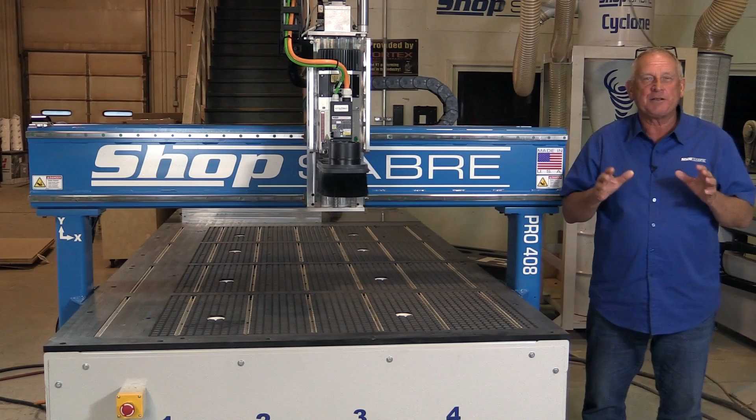The machine we're going to be using in the demonstration today is actually a ShopSabre Pro 408. 408 simply means 4 foot by 8 foot. Pro means production. You know, people ask me all the time, how do you really judge these machines? I said, well, it's really simple.

Here's where I start. I start at the base, and I look at how the base is structured. These machines are all welded. It's structural steel. It's made in USA steel. So I think if you start with quality components, that creates a great basis, and that's how we've done these.

Now, the other parts of the frame are actually the gantry, and once again, these gantries are tubular steel, all welded, and we also have tubular steel supports. So those are the 4 frame parts. Now let's talk about what makes all this stuff move, and it's called motion control. The first part of machine motion is actually defining the axis of travel, and here's how we do that.

These are actually precision contour guide rails, and you'll find those in all 3 axes. We get asked sometimes, how do you determine what this spacing is? Well, we use a process for engineering called finite element analysis, and that basically tells us where to space those to get the maximum support for the cutter in the material. That's why these machines cut so well.

All right, now, what actually moves the machine around are the ball screws, and these machines are all ball screw machines, so that means we have precision ball screws in X, Y, and Z axis. And you know, the application that we're doing is really critical for accuracy. So let's stop a minute and let's talk about how this whole ball screw thing fits in.

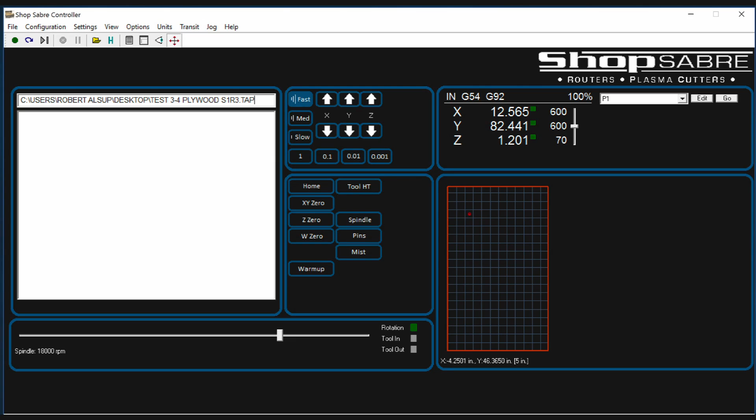Now, from an operational standpoint, all I really have to do is load a program. Then I click on this little icon, and it displays on the screen what the program is going to produce. Now, that's visual validation. So number one, I know what I'm going to cut, and the other part, it lets me kind of get an idea of where the parts are going to be on the table.

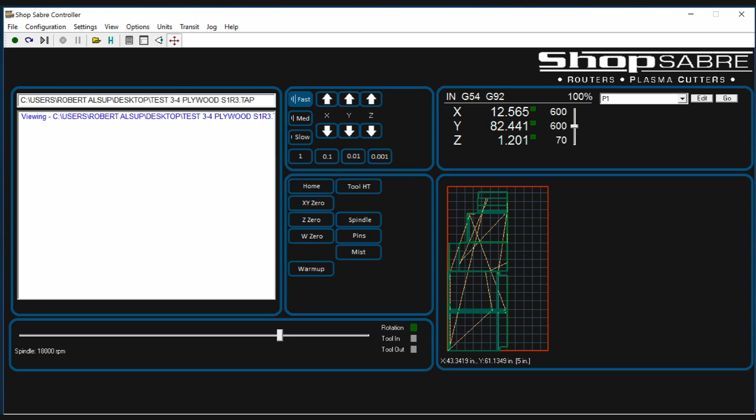When I'm happy with that, I simply hit the green button, which is the start button. The machine starts executing the program, and actually on the display over here you can see the exact live position of where the machine is.

So it's a really, really simple, powerful control system. Now let's take a look at the machine spindle. This machine has a HSD spindle. This happens to be an ATC spindle. That means automatic tool change because the machine has that feature. We offer these in a number of different horsepower ratings based on what your machining applications are.

But you know, here's an interesting part right here I always like to look at, because what we wanted to do was to increase the rigidity of the tool plate, because that allows us to have more axis travel. And to really get the maximum advantage of your machine, you have to have enough axis travel so that if you can get a part under the gantry, you can actually machine it. So that's really what started all this.

So we plugged the data into our FEA system, and we tried 2 or 3 different ideas, and this one hit. The results came back from that, and then we did some testing and cutting, and it really worked well. And then we said, okay, now we know mechanically how it works. Can we reduce the mass of these plates and get the same result? And once again, FEA was used for that. And now you see this feature on all of our machines.

Well, we're talking about mass. So let's talk about another problem, and that is, think about mass of what's on this tool plate now, because of gravity, mass is weight. All right, so here's what happens. When you're raising the spindle up with the ball screw, you're lifting all that weight. When you're dropping it down, it goes down real easy. All right, well, there's an impact with that. Number one, it's going to probably make your ball screw wear out.

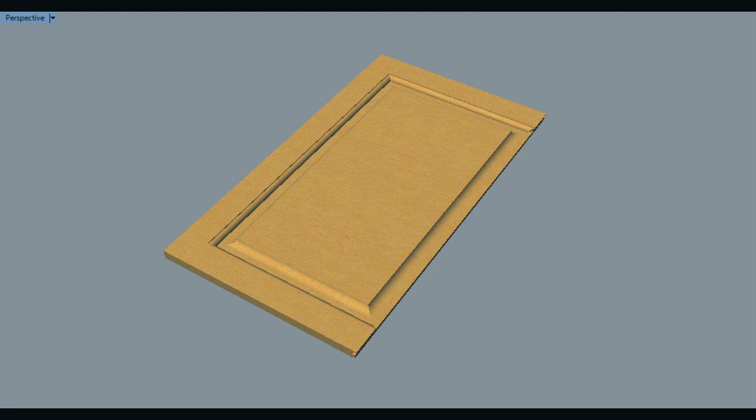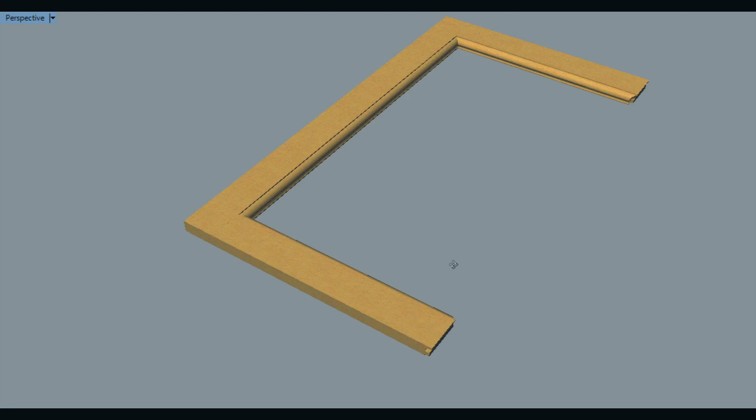And we'll hide that, and what we have left is what's called a stile. Stiles are the upright members, and this molding that you see on the inside here is called a sticking, all right? Now, let's look at something else. Let's get rid of this in the panel, and let's look at what you see down here. And the molding on the end of the rails is called a cope. So you had a tool set called a cope and stick, and that's how all this came about.

And then, of course, the panel actually floated inside of those grooves. So that's where the concept was. What we were trying to do was with tools and MDF create that look in a cabinet. And it became very, very popular, primarily when white cabinets became popular because you could actually paint that. And MDF was a tremendous material to machine out of.

And so that's where this all came about. And there were some people that actually cut these doors out and foiled them, different ways to add adornment to them. In our case, we would typically paint the cabinet white. So that's what we're trying to actually duplicate. Now let's take a look at what we have to do with tool paths to create that raised panel effect on the MDF panels.

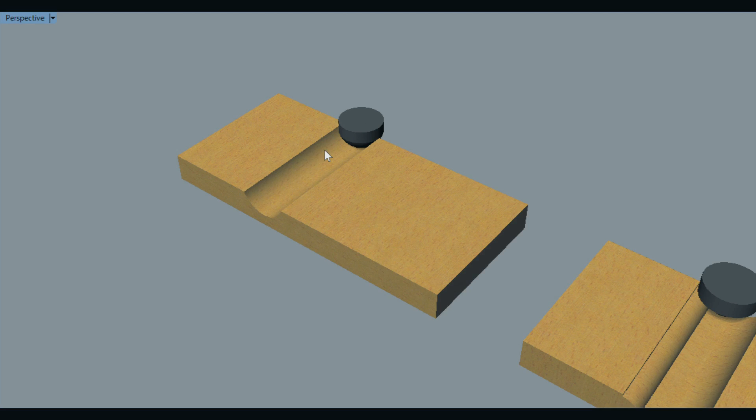Well, we start out up here and you'll see that there's a sample here. Let's zoom in on that a little bit. Now this is a piece of MDF material and you see the first tool path cuts a dished out area. We call that the panel cut, all right? And you'll see how this shape comes about. We'll zoom back out. Let's look at the next one. Now the next one is called a bead cut and it actually creates that bead effect. And you can see now that's pretty much what the cross section of a raised panel structure looks like.

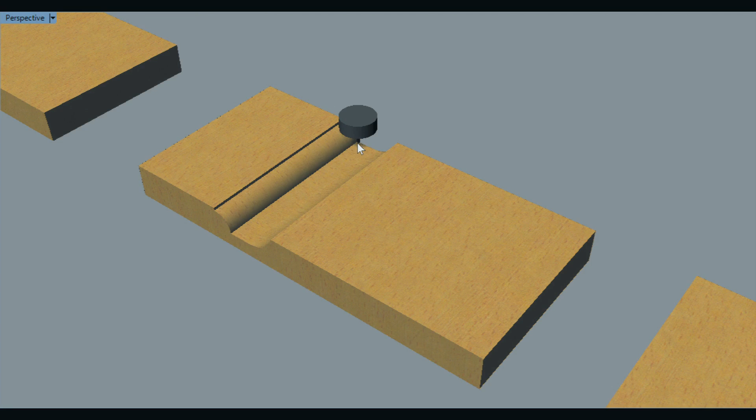Now, there's a couple other tool paths also that we use because we want to tighten up the corners. You don't see it on here, but the shape is the same as the bead. It's just a very small tip, so it goes much tighter into a corner. And then the last pass is the same tool, but up here at the top, and that's how you get the corner that looks like a really nice raised panel structure. So those are tools that are required to actually create this MDF surface.

Now let's look at the physical tools themselves. What you see on the table is a set of tools from our friends over at Vortex Tool. These are tools made specifically for this application. The tools that you see here are called insert tools. What that means is they have cutting inserts, and when they get dull, you only purchase the insert. So it's a really economical way for tooling if you're going to do MDF tool pathing.

Now let's take a look at each one. This is that first one that I showed in the simulation. That's the panel tool. Okay, and then this one is the bead tool. It created the bead. And then this last tool is what we call a cleanup tool. It's used twice, down at the panel level and up at the top of the bead level. And that gives us the much tighter square corners.

All right, now let's go to the next level and see what it takes to create the tool paths we're going to need to use these tools. Cabinet design software like Mozaik incorporated MDF doors into their basic programs. Let me give you an example of how that works. If you're doing a kitchen, you'll have certain designs that you like, and they're in a library. Let's take a look at that. It's in the door library, and you can have any number you want, really.

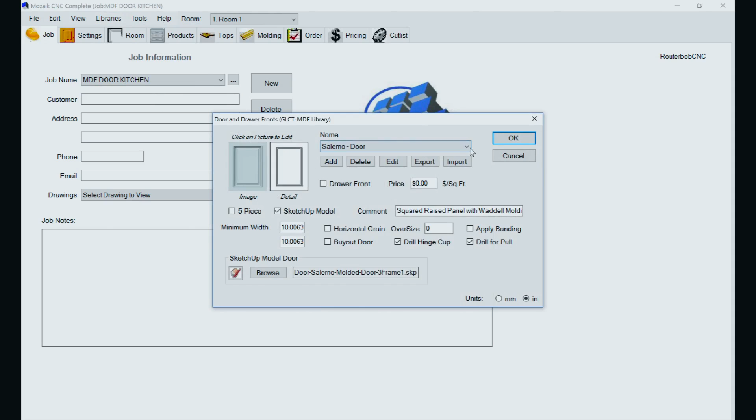There's a typical five piece. You see that's a drawer front. There's a raised panel. And basically you can create custom ones too, and those then become doors in your library. So you basically tell the program what you want to use. Now let's carry this forward, and I'll show you a complete job here. Here's a sample kitchen. You'll see the doors on here. These are the ones with a single arch at the top. These are rectangular. Once again, you can mix and match whatever you want.

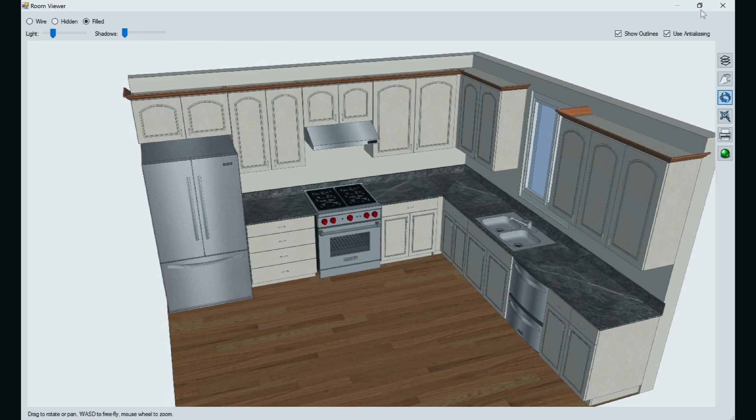Now let's go to the next step. How do we actually make the doors? All right, we've got them designed. So what we'll do is close this. We'll go over to the cut list. That gets us to the optimizer. And we'll just optimize to 3/4 MDF because that's what the doors are made out of. We'll overwrite the last job I ran.

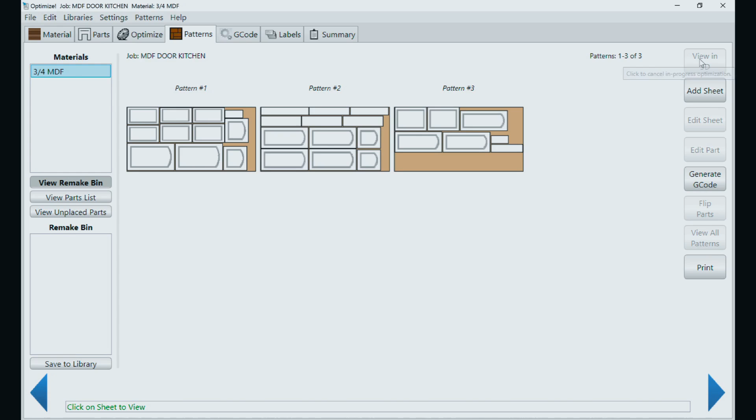Now what it's doing is it's actually going through and it's creating all those parts. And it's going to give us the opportunity here to actually optimize or nest them on a sheet of material. And we'll hit that, and it's pretty fast. And basically it looks like 3 sheets of material, and I produce all those MDF doors for that job.

So it's a really nice system, and then all I have to do when I get to this point is hit generate G-code, and it creates the programs to run on the machine. And that's automatic. Once on the optimizer, I have the tool set up for MDF doors. So it's a really, really, really simple thing to do.

But let's look at MDF doors from a little bit different perspective. One of the things I really like to show on some of these videos is things that maybe you hadn't considered that the machine has the capability to do. And MDF doors are a great example. Now, we've already looked at how MDF doors on typical cabinet jobs work, but there's another scenario here.

Let's say that, for instance, maybe a local shop finds out you got a machine and that you can make MDF doors, and they come over and they say, would you make some doors for me? And you say, absolutely. And what do you really need? I need to know what the style is, what the size is, and what the quantity. That's really all I have to know.

But you know, I don't have to do that in the front office. I can actually do that at the machine because the ShopSabre MMP controller actually has a Windows interface. Therefore, I can run the Mozaik software out there. What does that mean? That means I can give my machine operator that order. They can actually process it right there at the machine, cut the doors, get them ready to ship. I don't even have to be involved in the front office with the software. So it's a new way of looking at things.

And now let's actually go out to the machine and use that software on the machine control and cut a nest of these doors. I actually wanted to drive the machining demonstration in this video from a concept we call the door factory. And here's how this works. First off, because the ShopSabre MMP machine control has a Windows interface, that allows me to run the Mozaik software actually on the machine control.

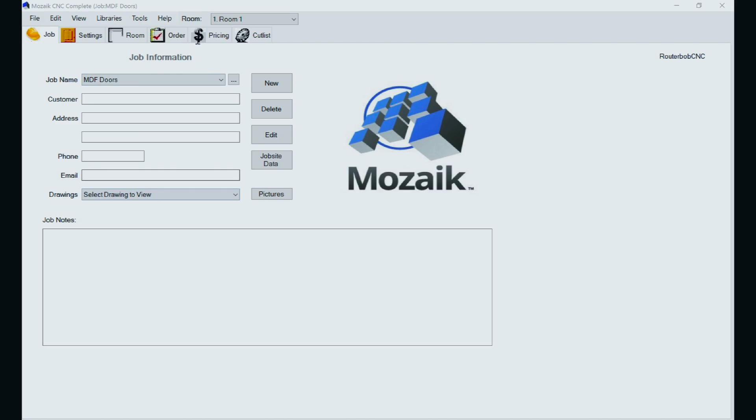All right, how does that relate to the operator? Well, first off, the operator gets a list of the doors for the job. So that's going to be a certain style door, it's going to be a certain size. Now Mozaik has an order entry system, and we'll take a look at it right here. And if I look in order entry, as part of the catalogs and sub-assemblies, there's actually doors. So I can click on that, drag it up here, and then my operator just simply types in the sizes and the quantity. And that's how we schedule a production run, okay?

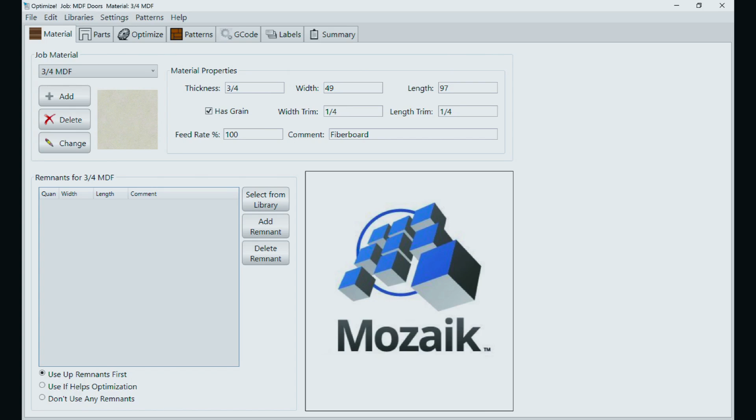Now let's go to the manufacturing part of that, and that's the optimization. So what we do in optimization, here's what the job looks like. Here's all our parts. We go to optimize. Optimize is another word for nesting. And let's look at our patterns. Okay, so it looks like for that order it's going to take 2 sheets of material. We'll run this one because that's a pretty nice nest. Now that's what the nest is going to look like. All I have to do is hit generate G-code, send the file to the machine control, and we can run that. Let's do that right now.

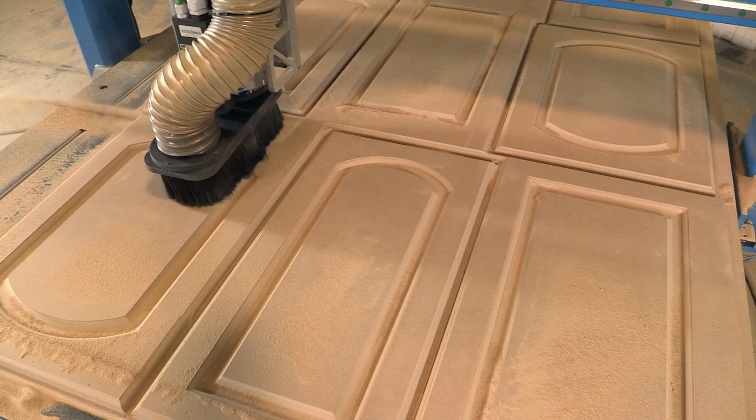Well, our MDF door project came out really, really good. The doors are magnificent, the corners are perfect, this area is perfect. Most people don't realize how difficult this application is. It's probably the most demanding application in woodworking, and let me tell you why.

The way we create this raised panel door is actually multiple tools, and 3 of those tools have to be set at exactly the same depth, and they're adjacent to each other. So if there's any variation, you see a line there. And on this, anywhere on the table, it's perfect. There are no lines. By the same token, when you start looking at the corners, they're all perfect and they're all consistent. That's what you get, first off, with a really good all-welded frame, but more importantly, a ball screw system.

If you try to do this with rack and pinion, here's what's going to happen to you. Rack and pinions have backlash, and backlash is another word for play. So you have 3 to 5 thousandths on each end, and sometimes that works fine, but sometimes it doesn't. Somewhere on that table, that play is going to show up, and you're going to see a defect in the door. We don't have that problem on a ShopSabre because we use ball screws. That's why these came out so well.